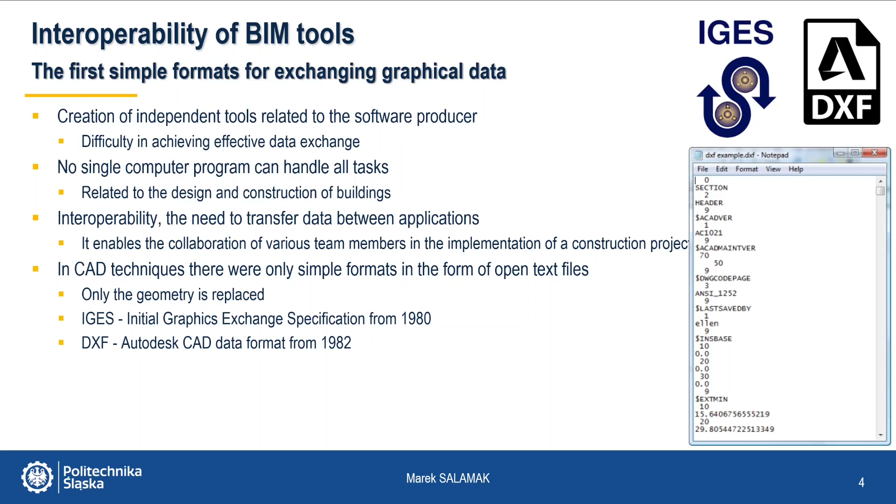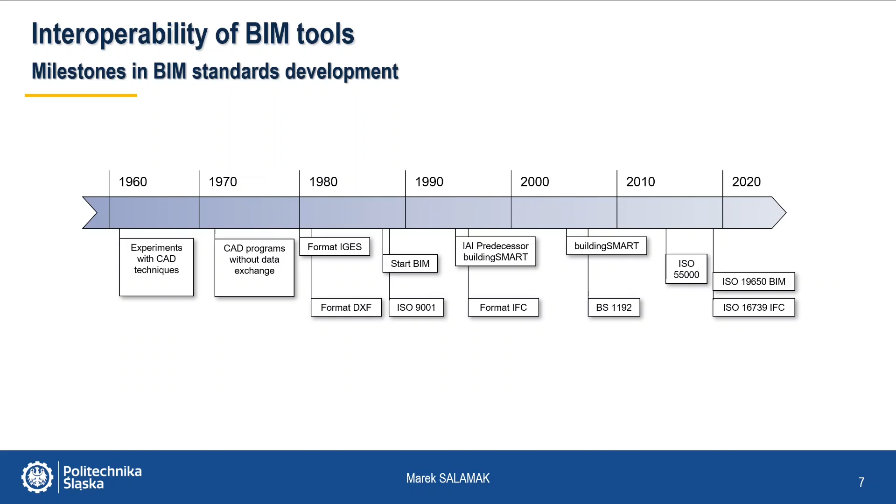The publication of BS 1192 and a series of international ISO 19650 standards has significantly accelerated the implementation of ISO 55000 compliant asset management systems and information management systems by infrastructure managers.

In the case of BIM models, the formats used in CAD and GIS techniques turned out to be insufficient. So software vendors began to communicate, and organizations such as Open BIM Network, the National Building Specifications and buildingSMART International were born. They contributed to positive changes, thanks to which new tools are becoming more and more useful for all users, not only for the industry for which the software is dedicated.

In 1994, the Industry Alliance for Interoperability was established to develop an object-oriented class structure for storing a unified building model. The association was then renamed the buildingSMART organization that exists to this day.

It deals with developing the universal IFC standard, IFC data exchange format, which means Industry Foundation Classes, and other related standards. It is mainly the Information Delivery Manual, IDM, describing what data and when are to be transferred in the business process, which can also be the construction process, and the Information Framework Dictionary, IFD, which describes the stored data in the form of a dictionary of terms.

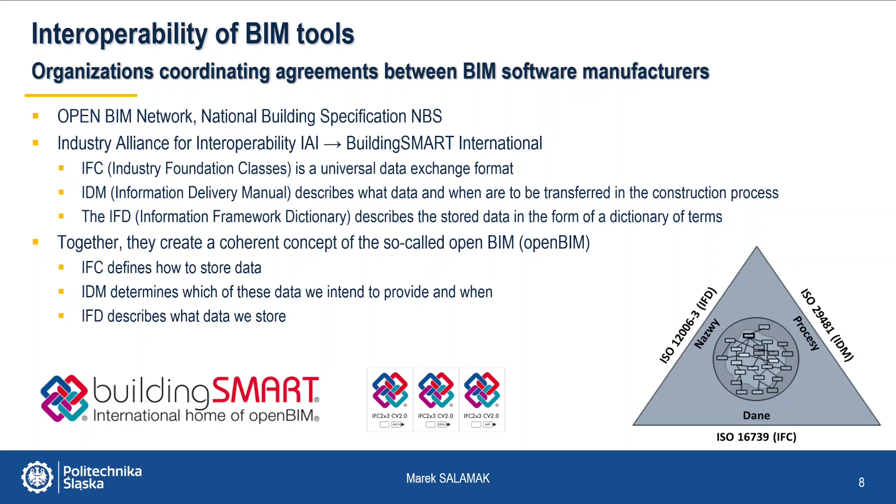Together, they create a coherent concept of the so-called Open BIM, represented on such a triangle. In short, it can be said that the IFC defines how to store data, IDM determines which of these data we intend to transmit and when, and IFD describes what data we store.

Standardization and the system of standards and technical requirements is the basis for the functioning and development of all sectors of the economy. The construction industry also uses many such documents. Some of them regulate general requirements or relate to other types of industry that are related in some way to our industry, construction industry.

There are also norms, standards, with a much narrower application that correspond to the specificity of, for example, bridge structures, bridge construction.

Introducing the BIM methodology to widespread use also requires appropriate standardization, which will ensure equal access to the services and supply market and freedom of competition.

Currently, the most intensively developed international standards in BIM are the result of combination of works within the Building Smart Association and the ISO and CEN organizations.

They are characterized primarily by being open to all producers of software tools for creating and editing BIM models. The condition is implementing the standard in a given program by creating appropriate commands and algorithms for data exchange. I mean, just export and import, which is not usually simple.

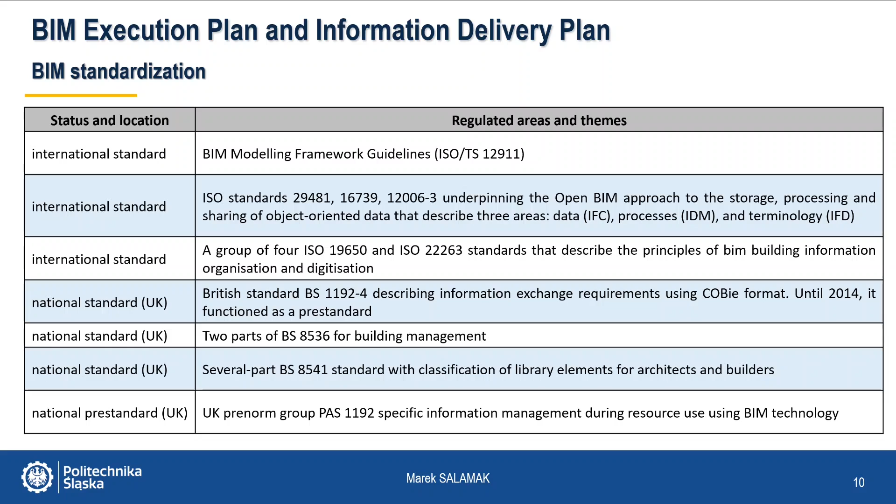Here we have shown the transformation of British standards and pre-standards into the ISO organization standard system.

Similar works are now underway at the Polish Committee of Standardization, and successive ISO standards related to BIM will be translated successfully from English to Polish.

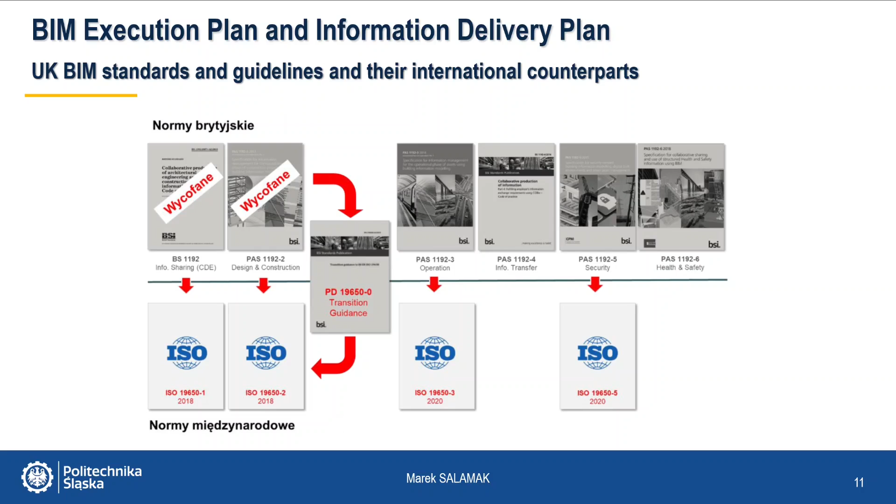The basis of this triangle that accompanies us today is the IFC format, which means Industry Foundation Classes, used for modeling data about buildings.

The IFC exchange format is described in ISO 16739 and is available on the Building Smart website. Although this standard is already marked in Poland as PN ISO, that's a Polish standard, it has not yet been translated into Polish. It describes the world's most widely used standard for digital 3D model recording, including information about a building object. It is the IFC format.

It is an open international standard for BIM data used for information exchange between participants' software in the construction process. The description of the data schema was carried out using the Step Express language, which is used to describe the data structure and the relations between them.

The IFC scheme was also supplemented with XML. Its syntax is based on tags that look like HTML structure used to create hypertext documents. The use of both data description methods makes it possible to present the object data in the form of open text. Thanks to this, it can be read and written by any software adapted to this.

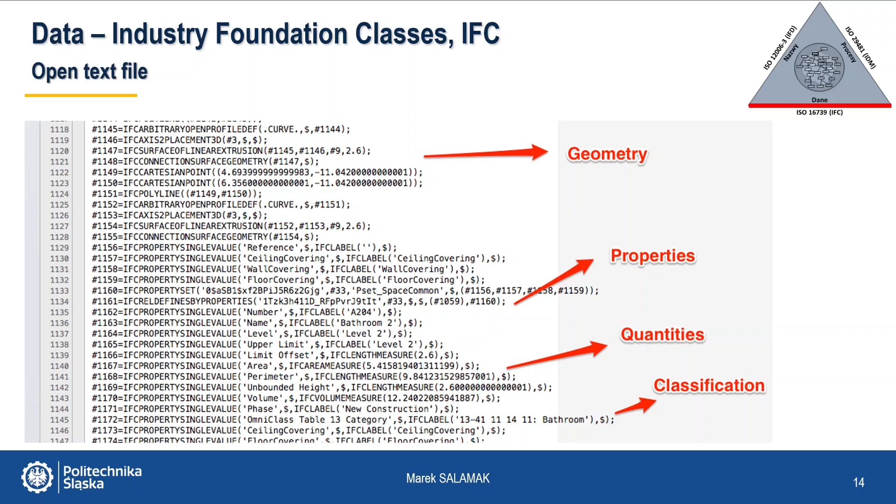This is what a fragment of an IFC file looks like. As I said, this is an open ASCII text file. Each row has its identifier in the form of a row number. These files, individual fragments, are used to describe the geometry, properties, provide parameter values, number of elements, and classification.

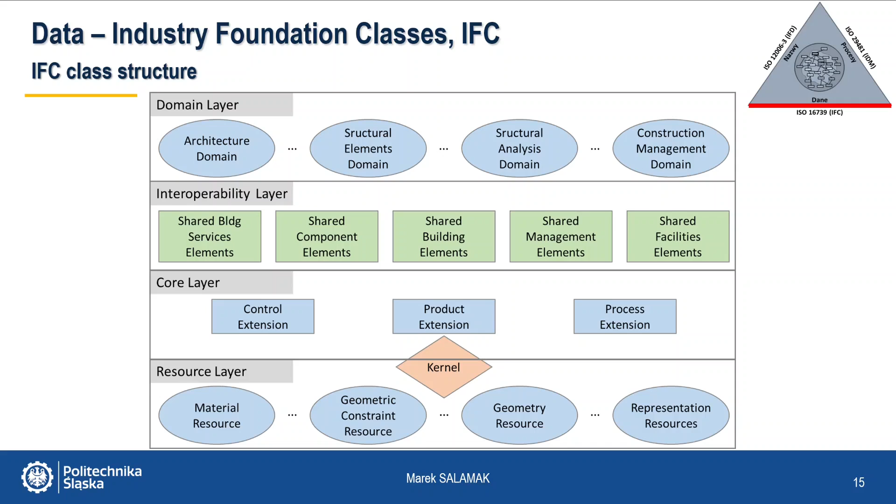An essential class in the IFC class hierarchy is the IFC object class that describes everything that exists. It is quite a broad term taken from programming, which can mean physical objects like a beam or column, and non-physical objects like processes or resources. Also assigned to this class are dependency relations between objects such as association, allocation, aggregation.

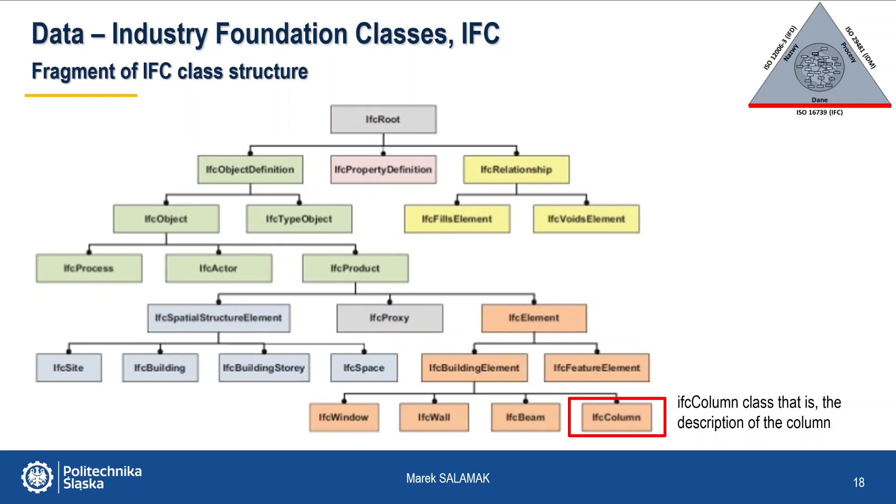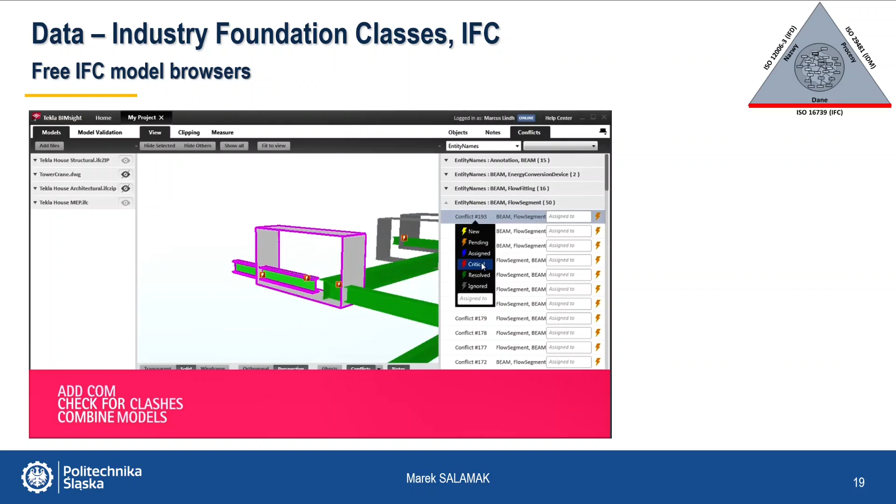Because the IFC format is open and text-based, you can easily create tools for its generation, modification, and interpretation. There are also many free viewers for models saved in the IFC format.

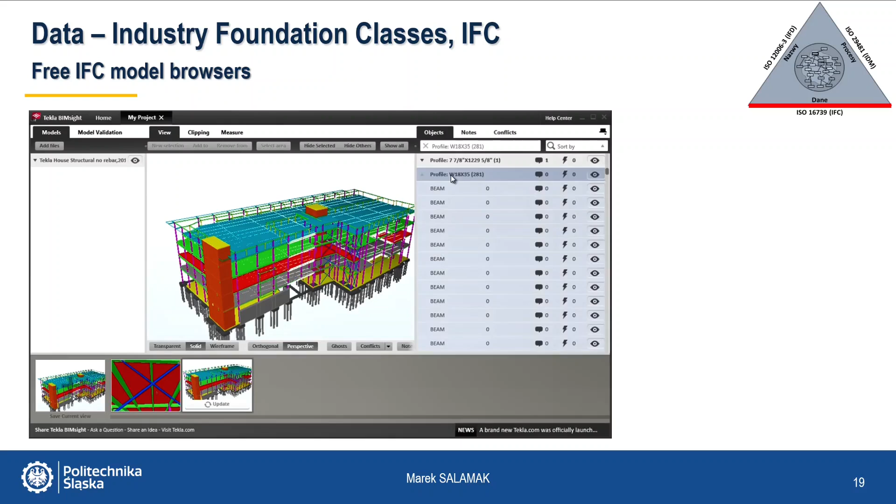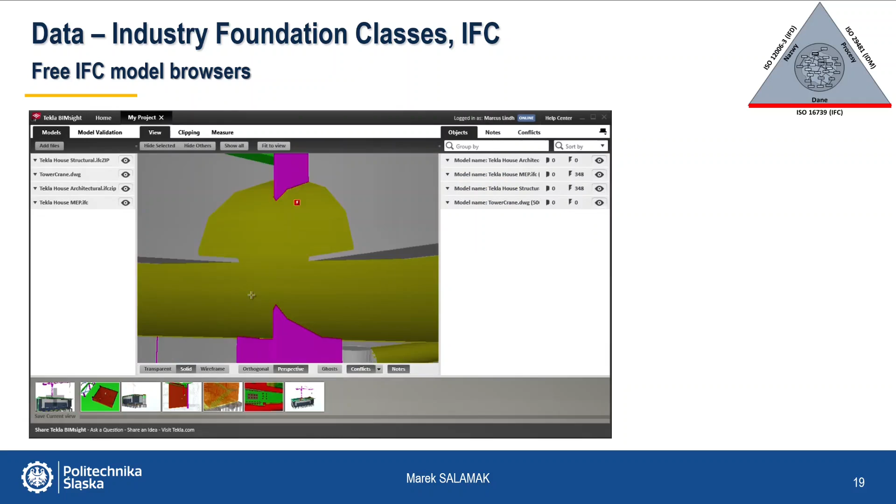Here's one example in the form of the now undeveloped Tekla BIMsight software. After Tekla, the Scandinavian company, was taken over by the American corporation Trimble, its role was taken over by a new Trimble Connect product.

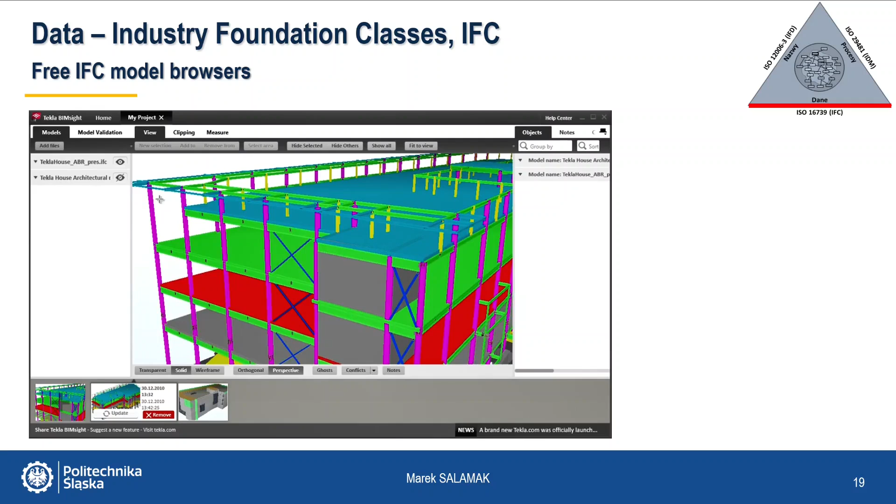Polish BIM Vision browser, developed by the Krakow company Datacomp, has excellent reviews. These programs' advantages are the open API that allows you to create plugins or use a graphic engine in your applications. In this way, the number of users expands, along with community panels and new application areas.

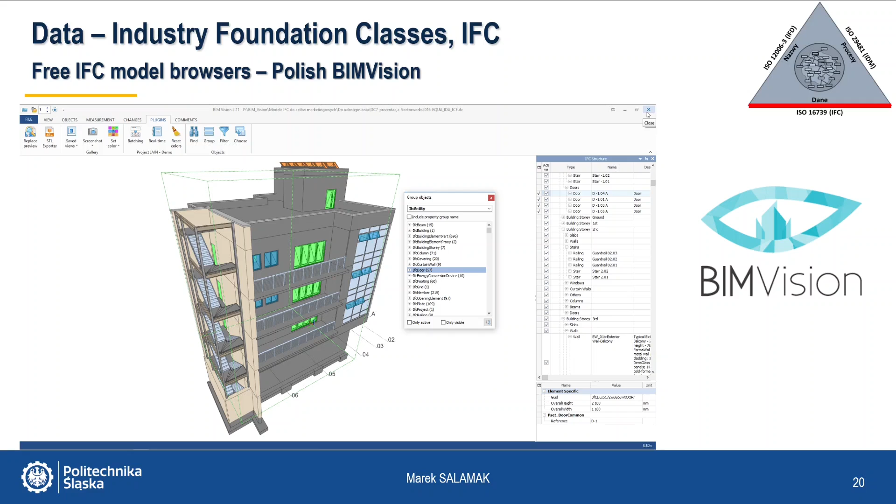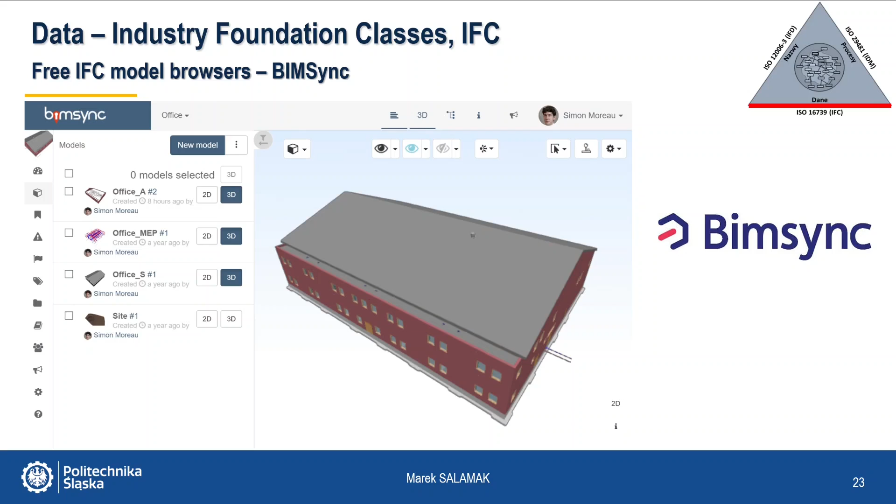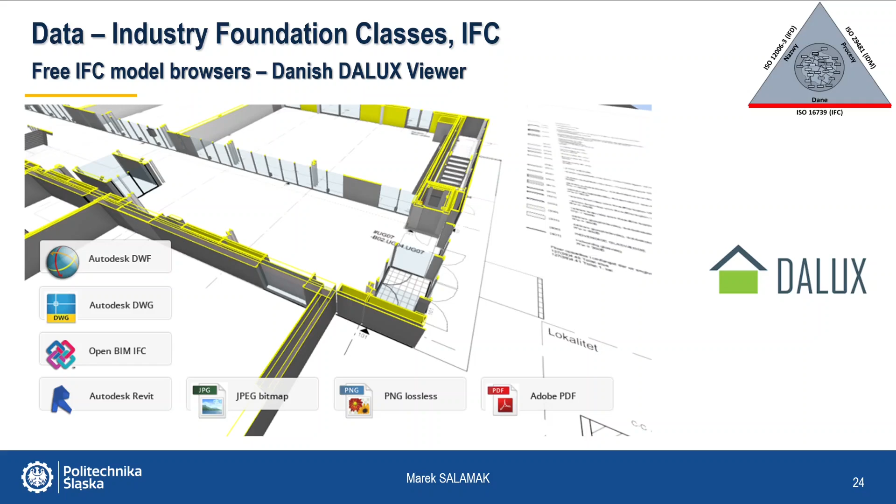Danish company Dalux is developing its browser, which is dedicated to mobile devices such as tablets or smartphones.

The Building Smart organization is gradually developing the IFC format. The implementation of this standard in commercial applications appears with some delay, of course. The date of the standard's announcement doesn't mean that software producers will be ready for implementation simultaneously.

Bridge elements appeared only in version 4.2, but are only now being implemented in commercial programs. In subsequent versions, elements of railway and water infrastructure are to be added.

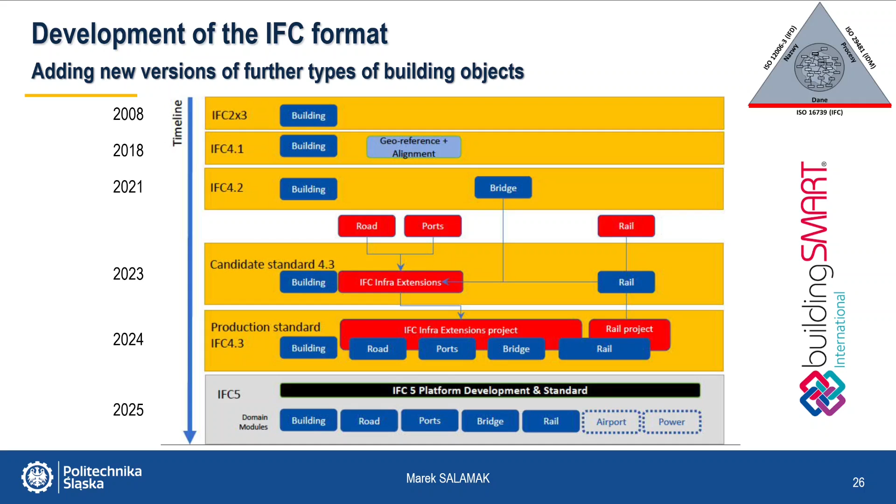Here it is shown in a slightly different form, from IFC 4.2 to IFC 5. You can see that consultations with the industry and software producers are postponed to the final stages and don't end right after 2022.

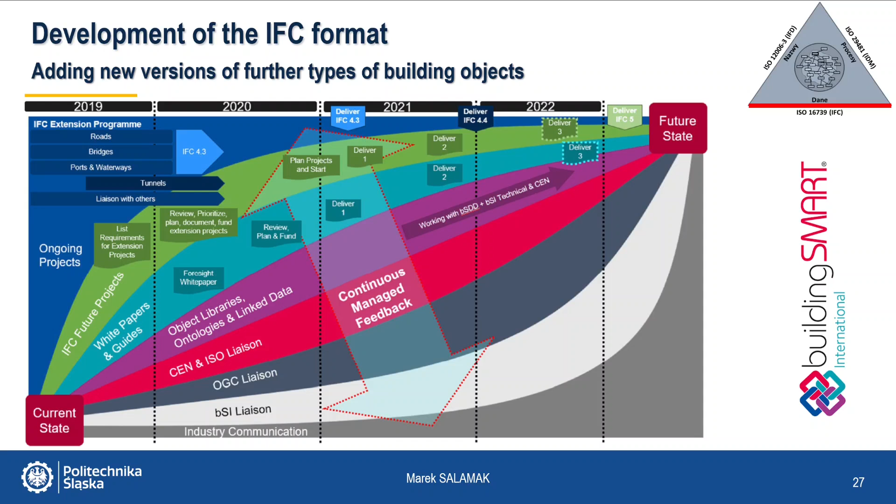The processes are described in the standard, which is the right side of our triangle here. There is IDM, called the Information Delivery Manual.

The IDM exchange standard is an information delivery instruction described in the two-part ISO 29481 standard. These standards also have a PN Polish equivalent, but still without translation. Its purpose is to define and locate the data that we want to transmit using IFC files.

Usually, the number of participants in the construction process and the amount of information exchanged between them is too large to be directly implemented in the IFC record. Each participant only needs a specific and necessary part of all the data.

And this change, along with the successive stages of the facility's life - design, construction, and maintenance - also occurs as they move to the next stages of the project, including the facility's life cycle.

They often change. To effectively describe these changes, a tool was created to describe business processes and related data exchange in a process map.

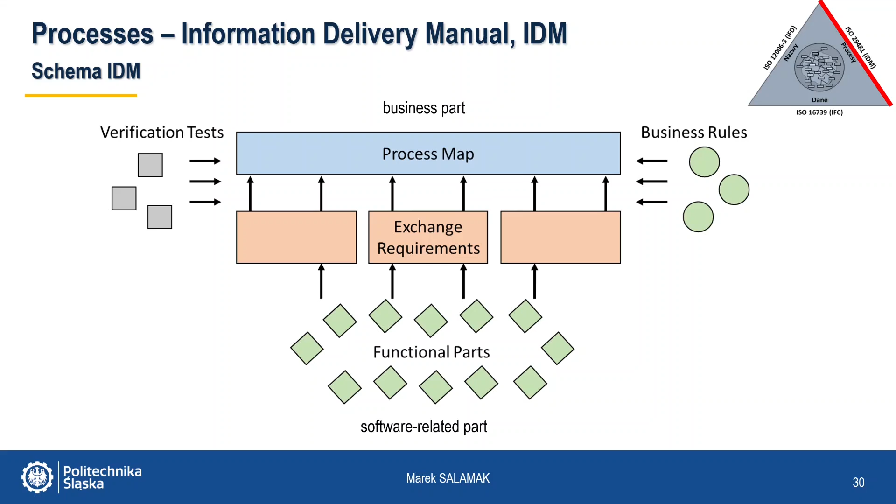Their task is to describe the repeating elements of the information exchange requirements in a programmable way.

The process map describes the activities needed to exchange information in a given process. Thanks to it, we obtain a list of activities in the process, the sequence of activities, a list of process participants, and indication of the information exchanged.

There are different methods for creating process maps. The business process modeling notation, BPMN, method was adopted in the IDM standard.

It is a graphical notation used to describe business processes and models, often used to optimize enterprises' processes.

This notation is developed by the independent organization OMG, the Object Management Group.

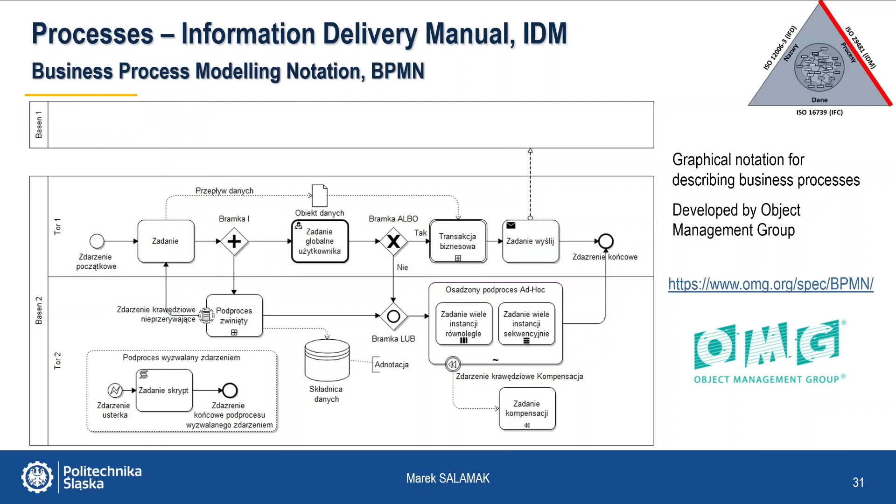Here we can see a graphical instruction on how to use BPMN to create a process map using this notation, available on this organization's website. It has also been Polonized into a Polish version for some time.

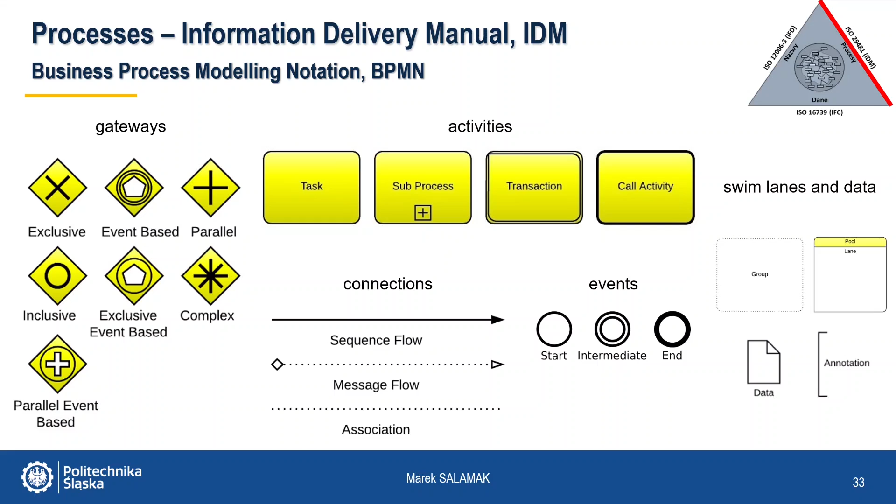Here we see selected symbols used to create process maps in magnification. So we have gateways, activities, events, connections between events or activities, and swim lanes and data.

Next, we have activities that describe the tasks they perform. And we also have data objects that describe the information transferred between participants.

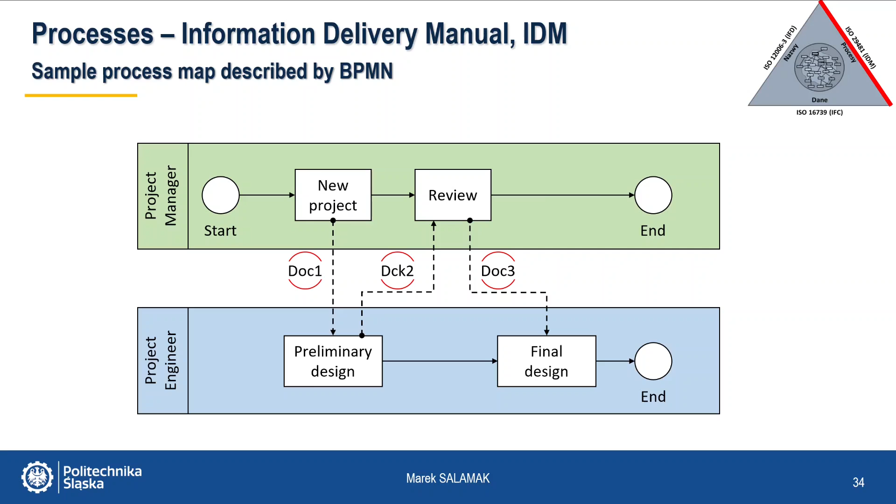The management of definitions and names is described in the form which is in the norm, which is the left side of our triangle. It's about IFD, Information Framework Dictionary.

The IFD standard is described in the ISO 12006-3 standard. It facilitates the creation of multilingual dictionaries, terminologies, or ontologies.

IFD provides a feasible method of linking IFC data to existing knowledge systems, projects, and product databases.

Moreover, IFD provides the possibility of multilingual translation of information from IFC, introducing a conceptual grid, calling it ontology, used in the construction industry for the linguistic and legal localization of the terms used.

Examples include fire resistance or door width. It has different names in different countries, like fire rating in English, and different description units, like Fahrenheit degrees or hours, depending on the country and the standard.

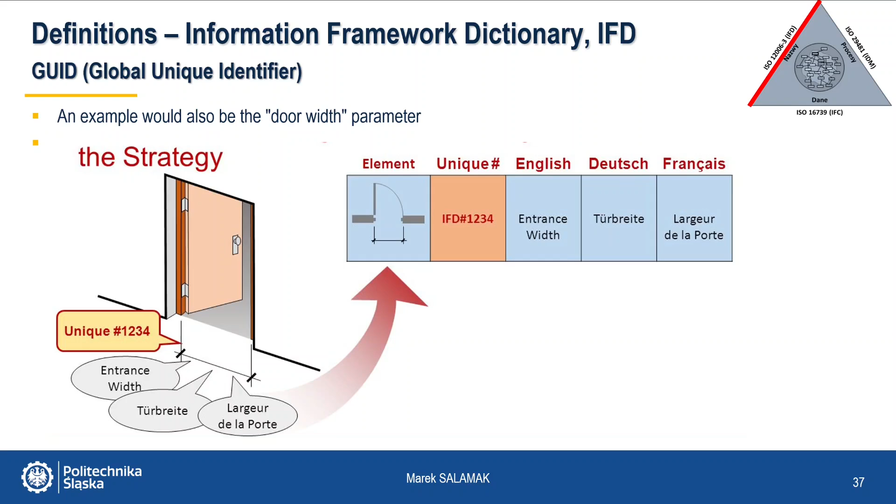IFD was used to create a technology labeled BSDD, that's the Building Smart Data Dictionary.

It is a library of objects with attributes which, thanks to special references, assigns descriptions downloaded from the database to elements present in the model. Thus, it enables the precise identification of the information contained in the model.

The independent BCF format, called BIM Collaboration Format, is responsible for supporting cooperation. Collaboration and communication flows have been deliberately excluded from the scope of the IFC.

IFC was intended to provide self-contained data models. However, it didn't solve the need to exchange information related to a specific part of the project, such as requests for information.

It also didn't allow for the coordination of sequencing or solving problems occurring during the project lifecycle.

To guarantee a neutral way of exchanging questions, comments, and problems regarding IFC files, a neutral BCF format was created.

Its history dates back to 2010, when Tekla and Solibri began to develop an initial BCF scheme called BCF XML.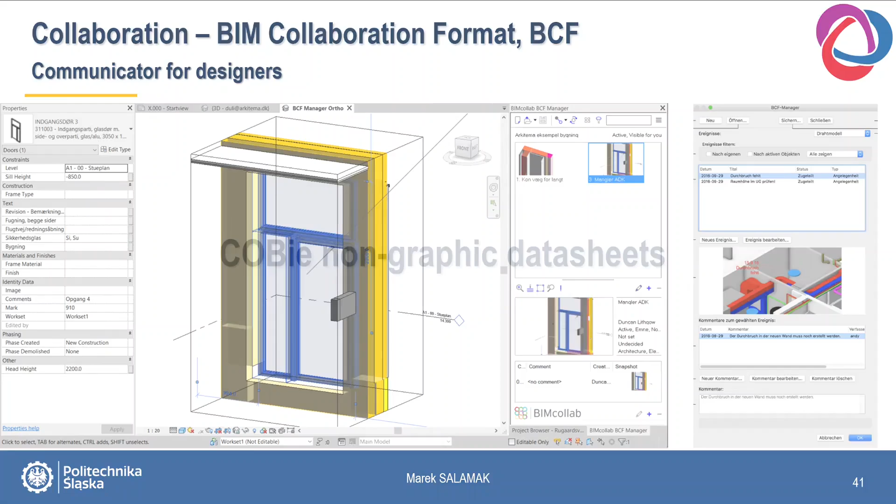Now a few words on a non-graphical COBie datasheet. This format is not so popular in Poland yet, but it is also an open format, and it fits in with the Open BIM philosophy.

COBie is a documentation standard that contains data for facility management. It is in the form of a simple spreadsheet, completed depending on the project phase. The sheet data includes the equipment of the facility and information about each equipment element, technical and operational parameters, origin, price, warranty period, date of installation, spare parts lists, inspection dates, etc.

It can be used with various building classification standards, which I will talk about in a moment. For example, the American OmniClass, the British UniClass, or the Norwegian NS 3451.

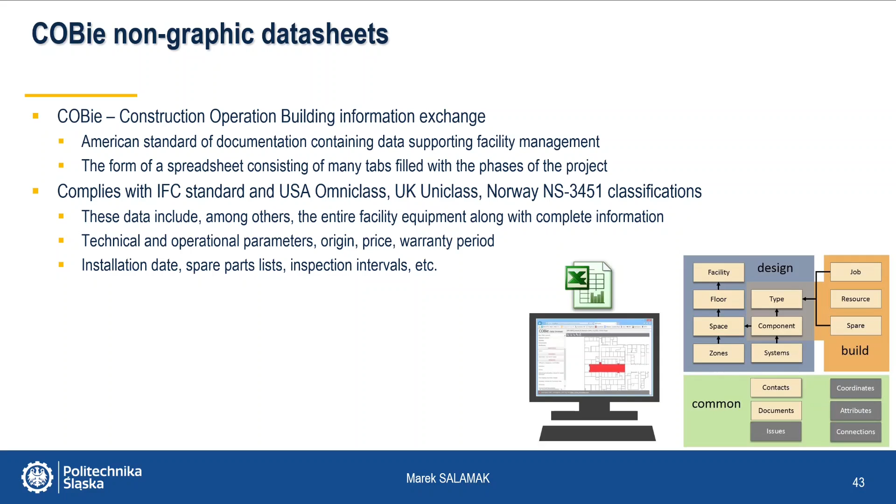The most important feature of COBie is interoperability, which is both at the user level, because the data recorded in this standard is available and understandable for virtually every supplier and other participants in the investment process, but also interoperability at the designer level, because many programs used to create 3D models have the option of automatic COBie file generation.

Openness is also important. COBie is fully compliant with the IFC open format, and multidiscipline because it covers all industries in a given building structure. By saving them into the COBie sheet, they can then be easily imported into facility management systems.

Here we see an example of the COBie plugin used in the IFC file viewer. Selecting objects on the model highlights certain lines or objects of the sheet and vice versa. Selecting the sheet rows results in highlighting the object in the model.

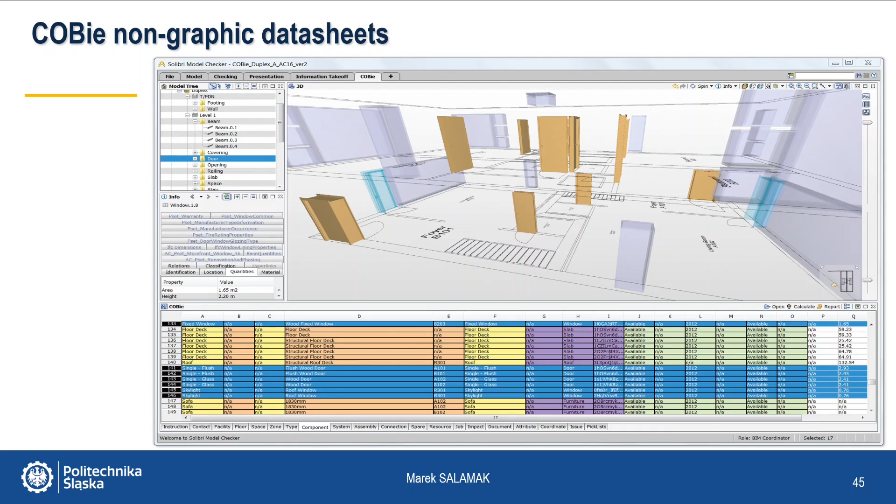Now we will discuss construction classification, which should also comply with the BIM methodology. Apart from the norm standards discussed earlier, construction classification systems are also important. This is about the classification of materials and types of works used in construction, like the Polish classification of products and services known in our country. Besides, there are also such systems in Poland as the Polish classification of construction objects, Polish classification of activities, common procurement vocabulary used in public procurement, or used in the costing of material input catalog.

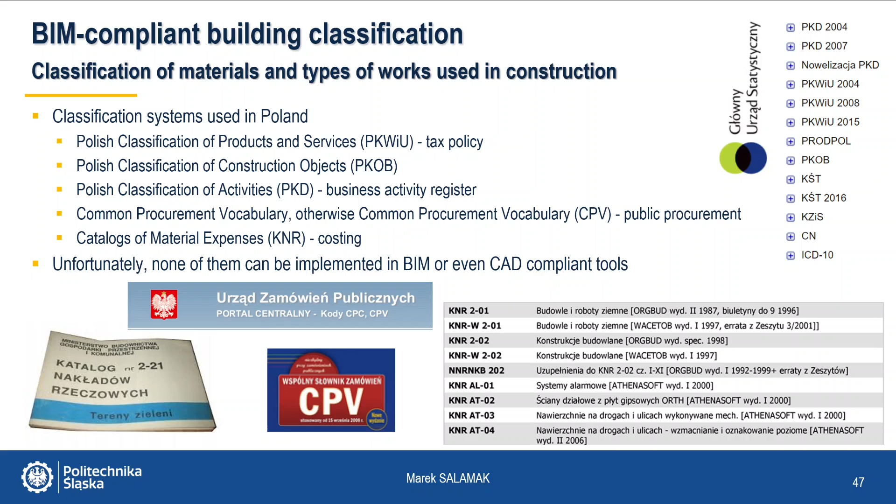I used these yellowed books myself when I was still a student in the times of communism in Poland. It was many years ago. Unfortunately, the approach to costing construction works in Poland has not changed since then, and it's time to finally change it with the implementation of the BIM methodology, because virtually none of these classifications can be directly implemented in BIM compliant tools or even CAD.

Meanwhile, there have been construction classifications globally for a long time, which were first used in CAD systems and then developed and adopted to the BIM methodology. The most famous systems are the American OmniClass and the British UniClass.

The OmniClass system is a classification system used to organize and retrieve information in the construction industry, developed by the US Construction Specifications Institute in the early 1990s. Today it complies with the latest international ISO standards for BIM. OmniClass contains 15 tables, which also include products and works.

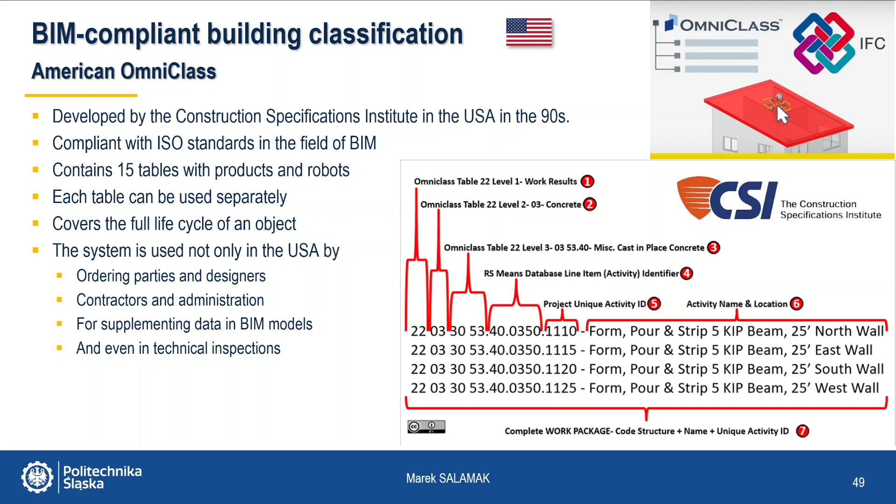Each table can be used independently to classify a specific type of information. They cover the entire life cycle of the facility, from the concept to its demolition. The system is widely used by ordering parties, clients, designers, contractors, and administration to complete data in BIM models, and even for inspections and technical condition assessment.

UniClass is a consistent classification for all products in the construction industry developed by the National Building Specification in Great Britain. It contains tables that classify items of any scale, from small products, like an elastomer bearing, for example, to large objects like bridges or buildings.

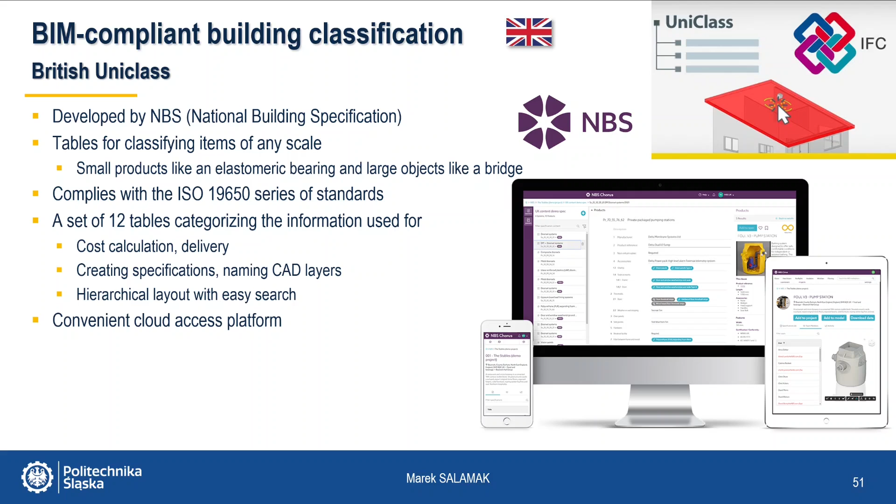UniClass complies with the ISO 19650 series of standards. It is divided into 12 tables that categorize information used for costing, delivery, specification, CAD layer naming, etc. The table layout is hierarchical and allows you to find the information you want easily. NBS has also prepared a convenient platform for accessing the classification, which is based on cloud solutions.

Here is an example of using Uniclass to describe several products and construction works. We have fixed bridges, bridge abutment wing, bridge bearing, and even an elastomer expansion tape for expansion joints. I just chose the formwork assembly and the bridge inspection for works.

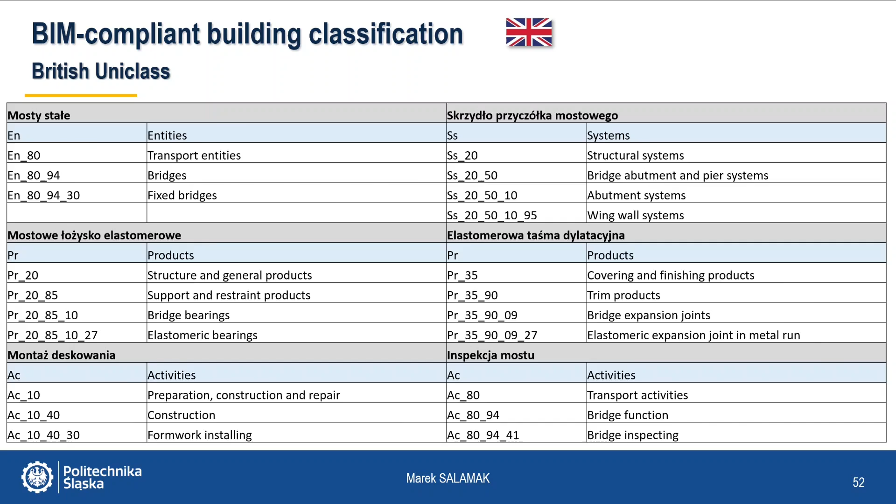For the effective implementation of the BIM methodology in our country, or any country, there is no Polish construction classification system that could be used for costing with the use of BIM models. Such a system should be compliant with the provisions of the Polish standard PN ISO 12006, which will ensure its consistency with international standards. It will also be desirable to use good European examples, but taking into account the specificity of national costing practices.

Now let's move on to the rather monotonous and boring description of BIM information and management processes. Unfortunately, we have to go through it because, in fact, it is a key element of the BIM methodology.

When performing contracts using the BIM methodology, several additional documents and procedures are used in relation to the classic contract provisions. They result from the relevant standard regulations, in which the ISO 19650 series of standards is the leading one. These standards were created based on the British standards of the base BS 1192 series, which had previously been tested in practice on many contracts. Their transfer to the international level resulted from their effectiveness in implementing BIM in Great Britain. It also made more and more countries decide to implement the BIM methodology in this way.

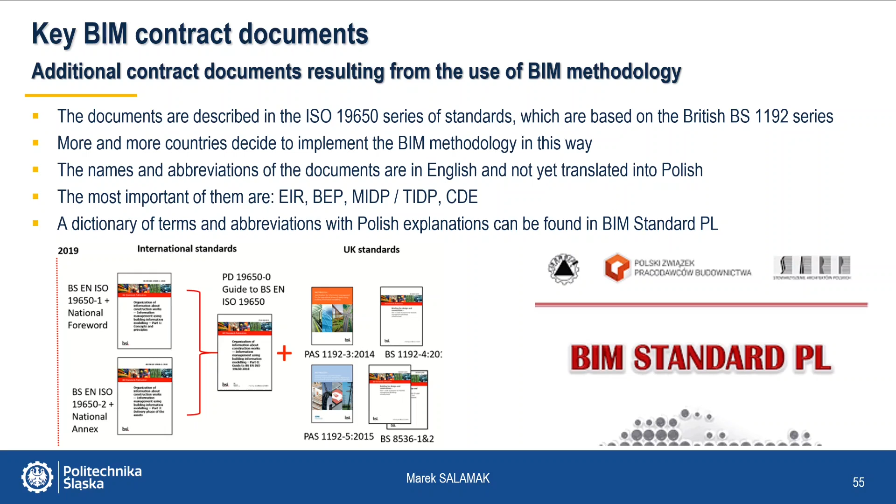On the occasion of preparations for the first pilot project in Poland in infrastructure, the consultant team selected by the National Road Administration, in the form of the ECC BIM Foundation, developed a dictionary of the most important terms related to BIM. This dictionary was later developed into the BIM standard PL, thanks to which it can be consistent with future national regulations.

The method of information management and data processing depends on all construction process participants like client, designer, contractor, and manager, who take responsibility for part of the entire process. This means that investors who ask for, let's say, a BIM project in the contract will not meet the requirements of ISO 19650 and will not achieve the expected benefits.

Their participation in accurately determining what they require is of fundamental importance. The same will be true when inappropriate tools are used in the BIM process. For example, using a shared plain cloud drive as a CDE solution will not meet ISO requirements.

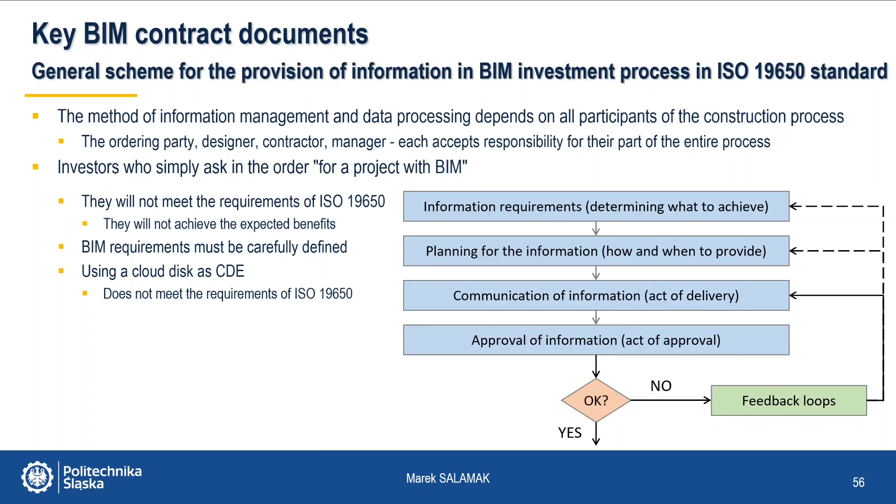The client's precise information requirements and goals that he wants to achieve concerning BIM use are also related to the investment lifecycle. This is because the information model of a building is created differently at the design stage and differently for the operation and management of the finished object.

The first case is referred to as the Project Information Model, PIM, which designers produce in the design process when not all of the details of the BIM model components are needed. The manufacturers and suppliers of specific solutions and equipment are not yet known. It is enough for the required target parameters to be defined so that it is possible to prepare project documentation.

Based on such a prepared PIM model, the contractor and subcontractors already create the operational Asset Information Models, AIM, during the implementation process. Before final commissioning, the information of the BIM components used is completed. These can be exact performance parameters, service information, warranty periods, datasheets, certificates, material tests, load tests of bridges, etc. These documents and information may be associated with 3D graphical objects. Still, the AIM model, due to the nature of the data stored, often takes the form of a spreadsheet, as is the case with the COBie standard described below.

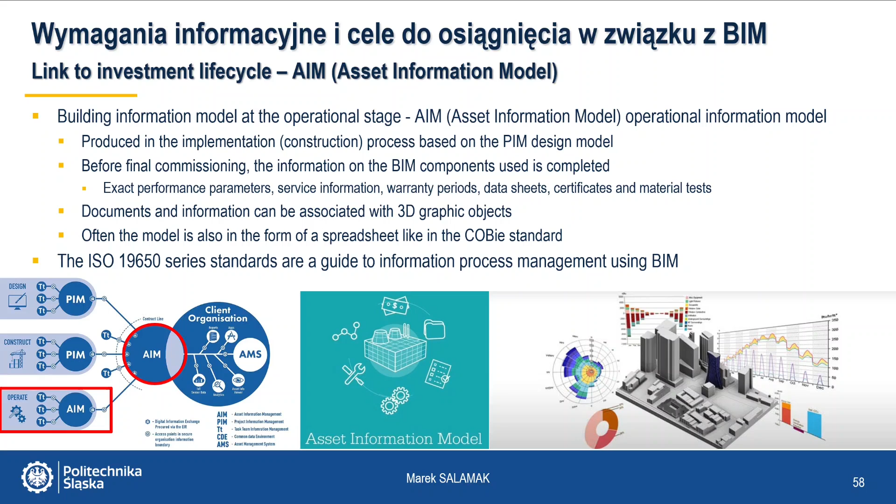Therefore, the ISO series standards are a guide on how to manage the information process to obtain the greatest benefits from the use of the BIM methodology in the investment project, from the very beginning by specifying the PIM model's requirements, but also after completion of construction by entering the requirements into the AIM model.

The implementation of the BIM information process of maturity level 2 follows the principles described by the ISO 19650 standard. The first principle is the purpose of the information process: to create an information model for a building's design or operation. These models are to be structured repositories of information needed to make decisions in the facility's lifecycle, in the design, construction, reconstruction, operation, and demolition stages. Models can contain structured information, which is of course preferred, or unstructured, for example in the form of visualizations

or video clips. The second principle is that the BIM information process is carried out in an environment in which individual process actors' responsibilities are clearly defined, most often included in a table called the responsibility matrix. There are also control and management functions closely related to the BIM process. These include, among others, a BIM coordinator and manager or information manager.

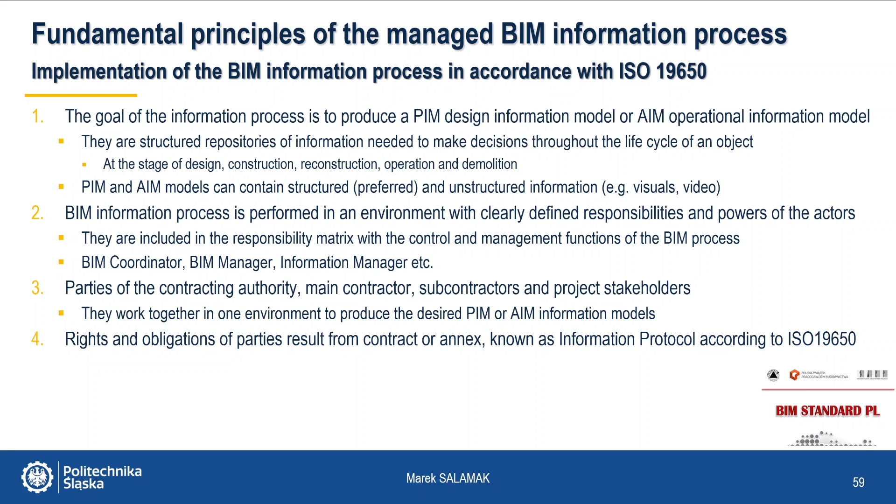The fifth principle: the process is divided into stages. In contrast to the British BS 1192 series standards, the ISO 19650 standard allows the project to be divided into any number of stages according to the client's needs and the project specificity. The stages are related to project milestones and data exchange points. These are either specific dates or other specific time points, for example depending on controlled or uncontrolled breakthrough events, such as obtaining an administrative decision. At these points, the employer requests information to decide whether to accept the stage or the need for further works.

A sixth principle: at each stage, for individual components of BIM models or groups, an increasing level of the necessary LOD information is defined, which the employer requires to meet the stage's information needs. As a result of the project implementation, the project's information level and value are gradually increasing.

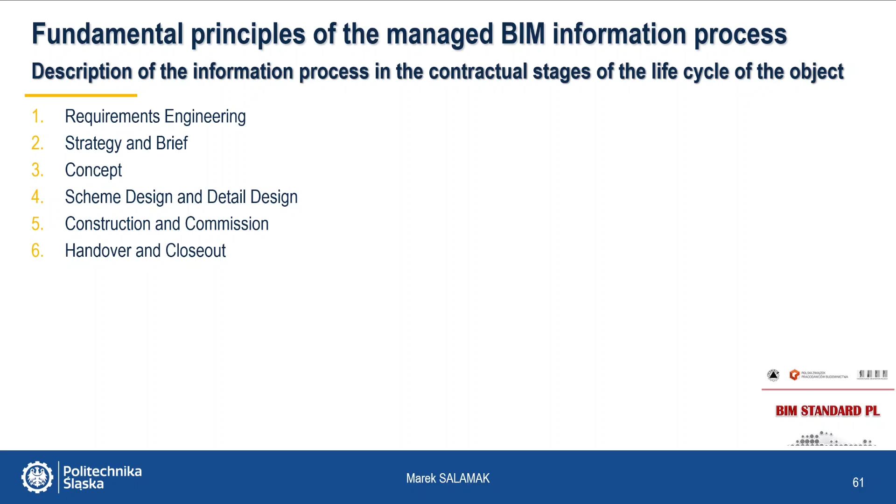The description of the information process is contractually divided into 6 stages of the facility's lifecycle. These are the following stages: requirements engineering, strategy and brief, concept, scheme design and detail design, construction and commissioning, and finally handover and closeout. One of the employer's first tasks needed to define the process of managing development and delivery of BIM information models is to define the stages of the development of your own project.

It is an essential element of managing the BIM information process in the project, as these stages will be associated with many elements of this process, such as milestones of the project, scopes of information supply like MPDT tables, LOD definition levels, data delivery points, and employer's decision points. They all constitute important components of the management process, as they span the entire BIM process over time and link the development of information models in a qualitatively controlled project environment with it.

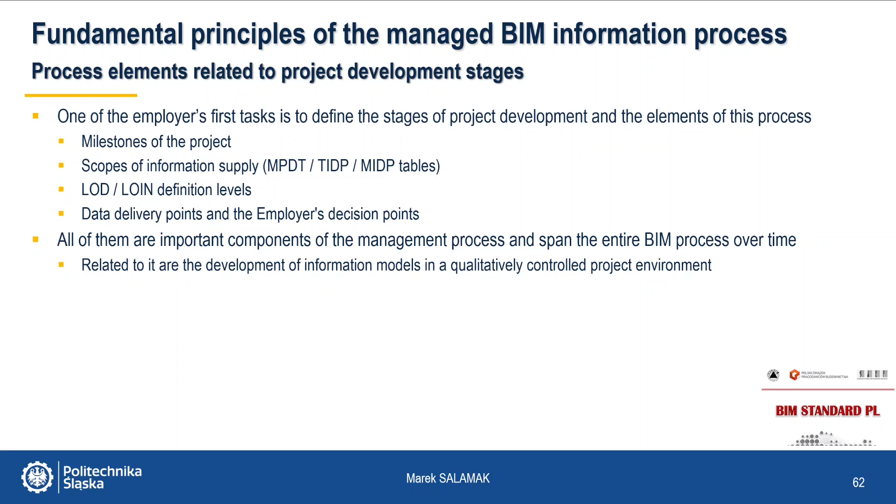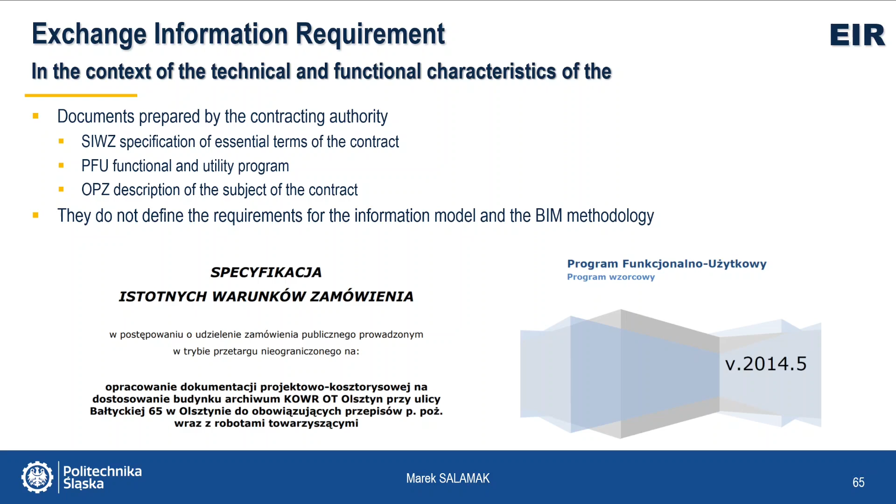In the first step, the contracting authority, the client, the employer, must define the scope and method of information management in the planned project or contract. The investor's requirements describing the ordered object and the context of its technical and functional properties are usually described in documents called the terms of reference, specification of essential terms of the contract, PFU, that's in Polish, it's Functional and Utility Program, or OPZ, this is also an abbreviation coming from Polish, description of the subject of the contract.

Such a document in the ISO 19650 standard is EIR, meaning Exchange Information Requirement. It should also be noted that the abbreviation EIR in the nomenclature of British standards means Employer Information Requirement, so it's a little bit different. In the ISO 19650 standard, the provisions concerning information requirements have been developed. It is about precisely describing the requirements for information processes that will be attached to other documents such as PFU or OPZ, already mentioned on the previous slide.

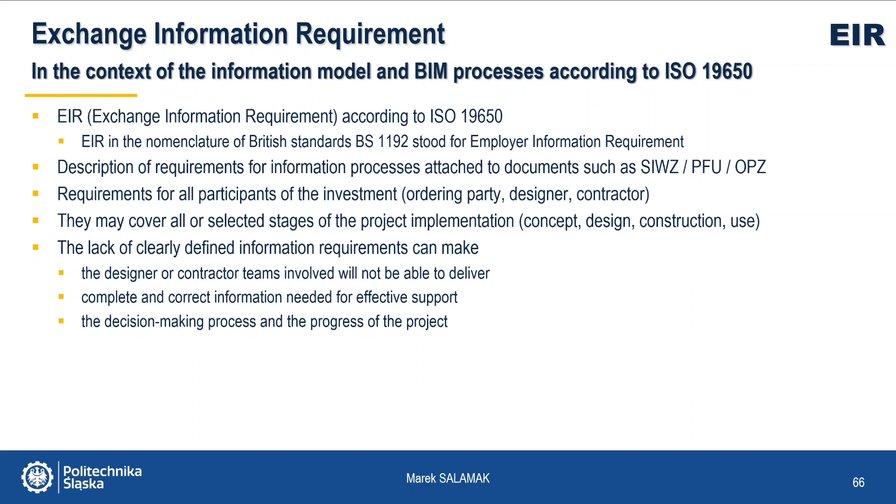Already at the tender stage, the requirements in this respect should be specified for all investment participants: the ordering party, designer, and contractor. Depending on the needs, they can cover all or selected stages of the project implementation: concept, design, construction, use. Well-prepared and as precise as possible information requirements are a key factor enabling the joint and effective management of information during the project lifetime. The lack of clearly defined information requirements may increase the likelihood that the design or contractor teams involved will not provide complete and correct information to support the decision-making process and progress effectively.

Essential documents that the contracting authority should prepare for contractors and suppliers are: Organization Information Requirements, OIR, which relate to the contracting authority's own business goals; project information requirements, PIR, which relate to the goals of the implemented project; asset information requirements, AIR, which concern information about resources provided in connection with their subsequent operation and maintenance; and EIR, exchange information requirements, which describe how the information will be exchanged between the parties.

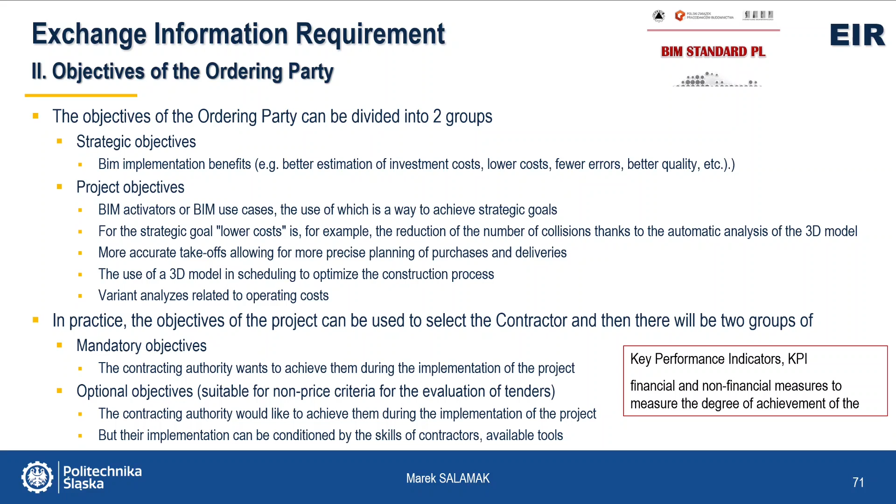The third chapter describes the management requirements. The contracting authority provides the contractor with a template of another document, such as the BEP and the MIDP or TIDP tables. We'll discuss them in a moment. In this chapter, the contracting authority defines which norms and standards are to be applied.

Next, the employer describes the file naming standard expected by him in the project. The file naming standard facilitates easier and faster access to information by all project participants. The file name can define the type of documentation, its status, and the area of the project it relates to.

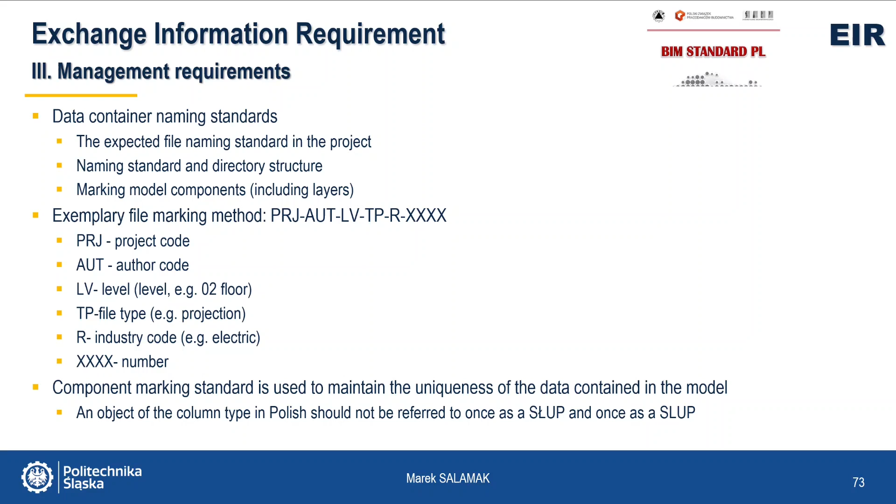The next element concerns the role of people in BIM methodology. Now we will know them. The procuring authority, the client, should define expectations regarding roles and responsibilities in the information process. In response to these expectations, the contractor should assign specific persons and their contact details to individual roles and responsibilities. BIM methodology and related information processes force the necessity to define new roles and responsibilities for the key personnel who implement the construction investment.

These people's competencies and the experience required for them do not coincide with the requirements imposed on people currently performing the so-called independent technical functions in construction: designer, construction man, site manager, or supervisor. Besides, they must be available to virtually all parties involved in the investment. Their knowledge and competences cannot be limited to only one architectural construction facility or geodetic industry. However, they must demonstrate a high level of skills in the field of digital information processing. Examples of roles include project information manager, BIM manager, BIM coordinator, or BIM modeler.

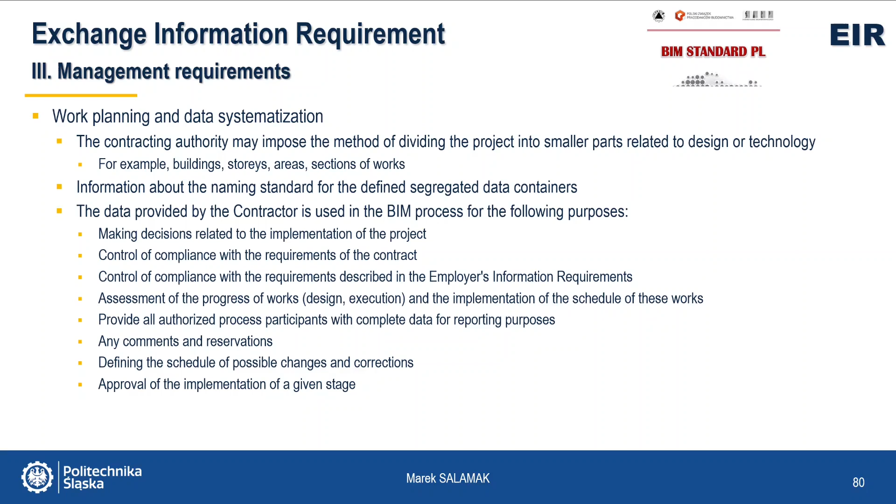The contracting authority defines the methods and tools that should be used to manage processes and data in the project. The primary management tool should be the CDE platform. Therefore, the contracting authority specifies the expected scope of its application in the project. Data security requirements and the method of authorizing access to the CDE platform are also specified.

One of the basic goals of using 3D BIM modeling is to detect and eliminate design conflicts at the earliest possible stages of the project, which significantly affects the investment's implementation costs. Due to the importance of coordination and detection of collisions for the employer, EIR introduces detailed guidelines regarding collision type and scope, which should be verified at the design stage. The processes that the contractors should carry out to eliminate collisions are also described.

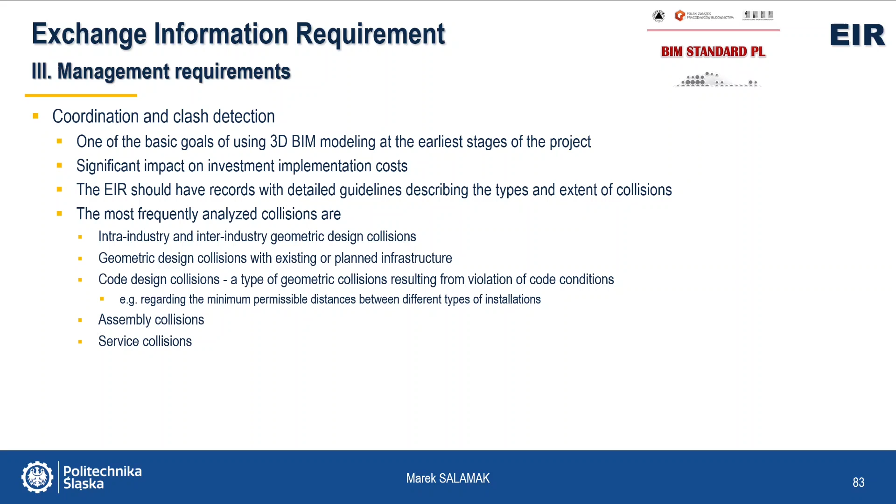The most frequently analyzed collisions are intra-industry and inter-industry geometric design collisions, or with the existing and planned infrastructure. There could be code design collisions resulting from a violation of standard conditions, an example regarding the permissible minimum distances between installations of various types of facilities, as well as assembly and operational collisions.

The employer then defines its expectations regarding the model review meeting. These are quite precisely described, and the dates of meetings are most often associated with the schedule of data delivery points, data drops.

The contracting authority may also define its requirements for using the BIM models in health and safety management. These requirements may apply to the design stage, including taking into account health and safety aspects, such as safe access zones, equipment collisions, marking danger zones, security design, etc.

It can also apply to the implementation stage, for example designing the staging of work phases for safety related to the saturation of specific areas with equipment or people, daily briefings using the model and indication of potentially dangerous zones, simulations of equipment operation, coordination of work and delivery logistics, etc. And finally, at the operation stage, for example, safety of facility users, renovation teams, evacuation routes, monitoring, alarm signaling, etc.

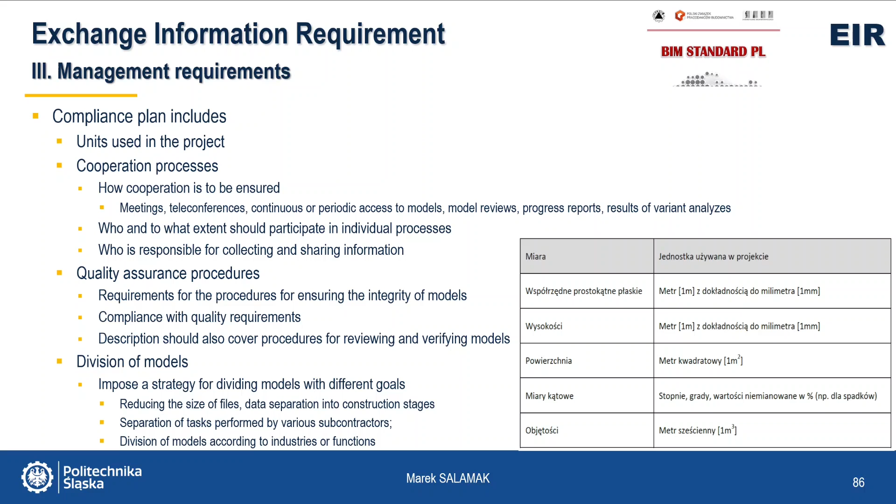The contracting authority should also describe the requirements, the fulfillment of which will guarantee the integrity of the BIM project's models and documentation, the compliance with quality requirements, and the control and verification tools.

The employer should indicate its requirements regarding the method and scope of providing information about the finished facilities and its assets. This is necessary for the maintenance and operation of the facility. The employer's planned scope and types of data for the facility operation stage are described here.

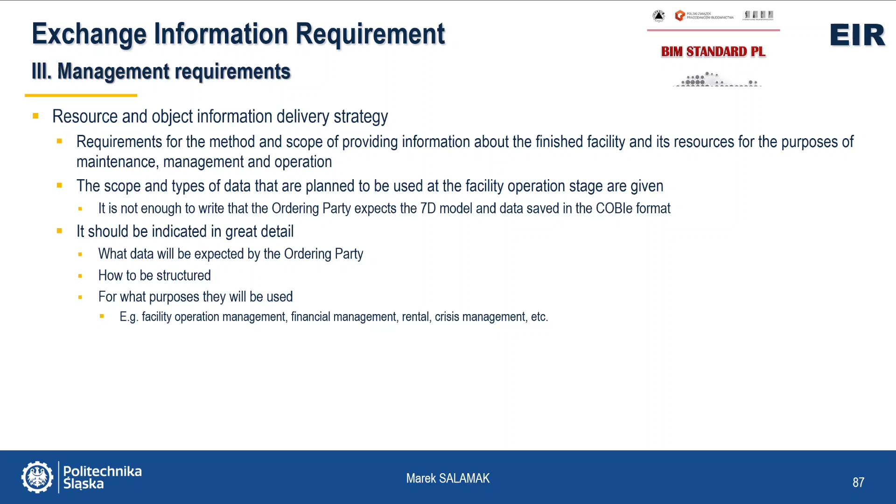Since the BIM methodology requires appropriate standardization of data and processes, a critical element of the BIM process is to define a software ecosystem for the project that guarantees the best possible exchange of information between all project participants.

In the fourth chapter, the contracting authority, the employer, defines its programming requirements that will be used by the contractor in the project, especially in terms of file compatibility, for example the compliance of the version number of the software used by all project participants.

The requirements for the file formats acceptable in the project are defined. Most often, this results from the software owned by the client.

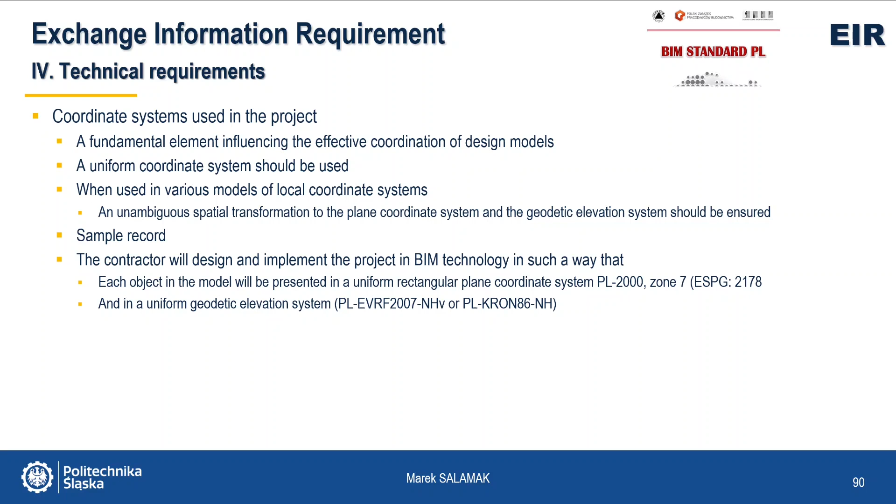One of the basic elements influencing the effective coordination of design models is the definition and use of a uniform coordinate system, and, in the case of using local coordinate systems for various models, ensuring an unambiguous spatial transformation to the plane coordinate system and the geodetic elevation system.

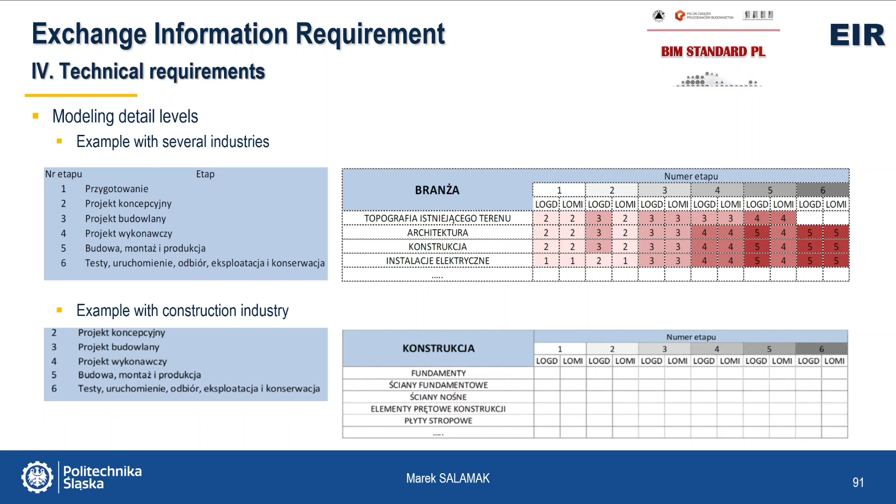In the next part of the fourth chapter, the levels of detail of the model are defined. Here's an example modeling level table for some sample industries, without breaking down into component groups.

Since an effectively conducted design or construction process based on the BIM methodology requires appropriate technical competencies, it is common practice to expect the employer to prepare a competency matrix specifying the necessary level of skills and knowledge regarding BIM processes and tools for the key employees of the contractor and the employer.

One of the basic elements of the BIM process is transferring the generated and accurate data to project participants. From the employer's point of view, it must obtain certain data from the contractor. This data can take various forms: text files, tables, lists, drawings like CAD files, and models.

Contrary to the traditional process, a BIM-based process defines many more data delivery points, called data drops. Their purpose is to obtain the information necessary to make certain decisions, check the correctness of the proposed solutions, check whether the BIM project documentation is implemented at the specific level of detail, approve the stage of work, launch administrative procedures, etc.

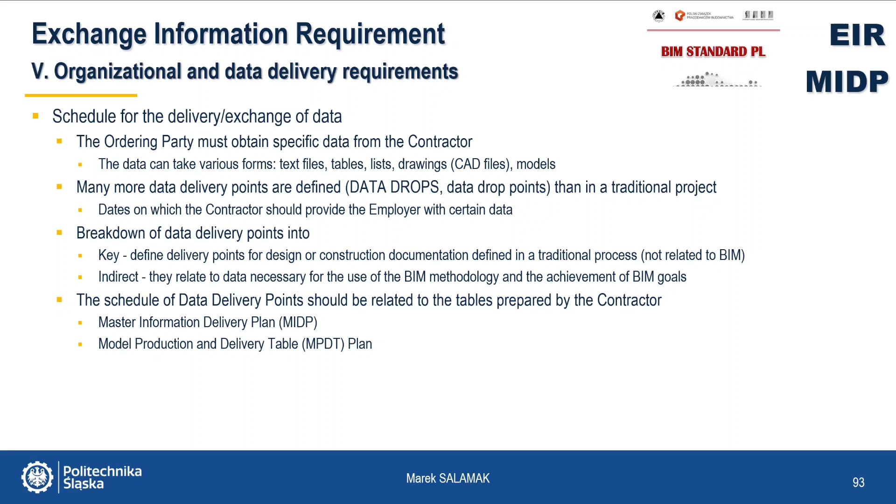The ISO 19650 standard recommends breaking down the supply of design information, the PIM model, according to project phases or stages, and in the case of information related to asset maintenance, the AIM model, breaking it into packages related to anticipated maintenance events.

The contracting authority, the employer, also specifies the scope of BIM documentation and its requirements.

BIM documentation may include industry models, coordination models, isolated models containing specific data, 4D, 5D, or 6D, mapping tables associated with models, CAD drawings, 3D CAD models, simulations, animations, visualizations, results and analysis reports, clash reports, reconciliation and communication reports, etc.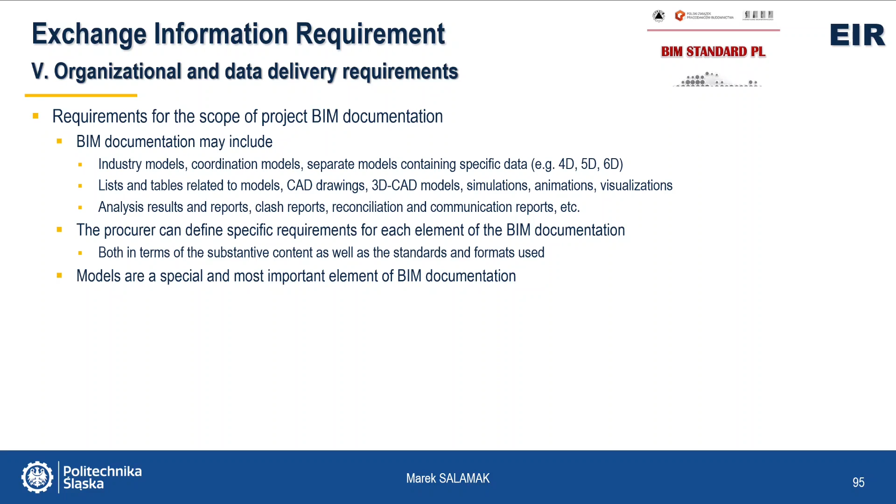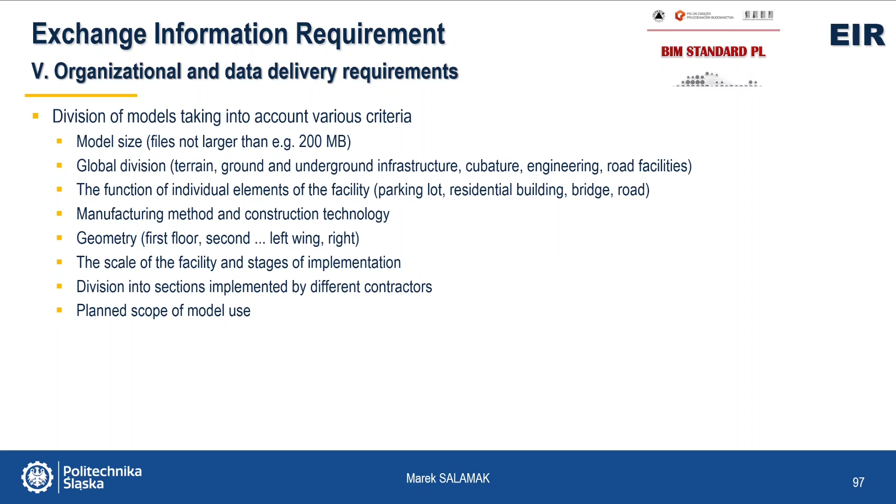The employer party may suggest or impose the use of a specific method of model division, taking into account various criteria, for example model size, global division, the function of object elements, construction technology, geometry, sections of various contractors, or the planned scope of model use.

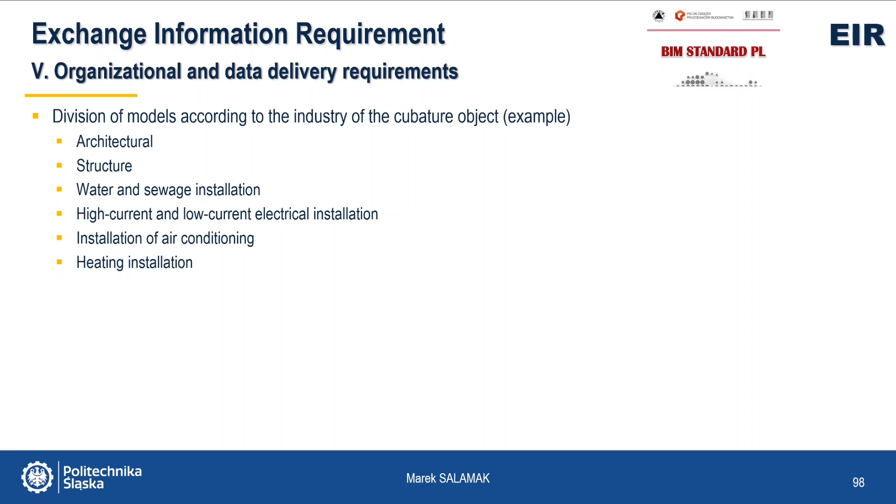If the ordering party has specific industry models requirements, it should describe them here separately for each of these models. The ordering party may describe its requirements and expected BIM competencies regarding both the contractor's organization and the individual key participants in the BIM process on the contractor's side. The description is intended to indicate to the potential contractor the areas of competencies that, according to the employer, will be necessary during the project implementation.

So much for the chapters of the EIR document. Now we will briefly deal with the BEP document, that's the BIM Execution Plan and Information Delivery Plan. In response to the information and information exchange requirements described by the contracting authority in the EIR document, the contractor must prepare its own implementation plans for these demands.

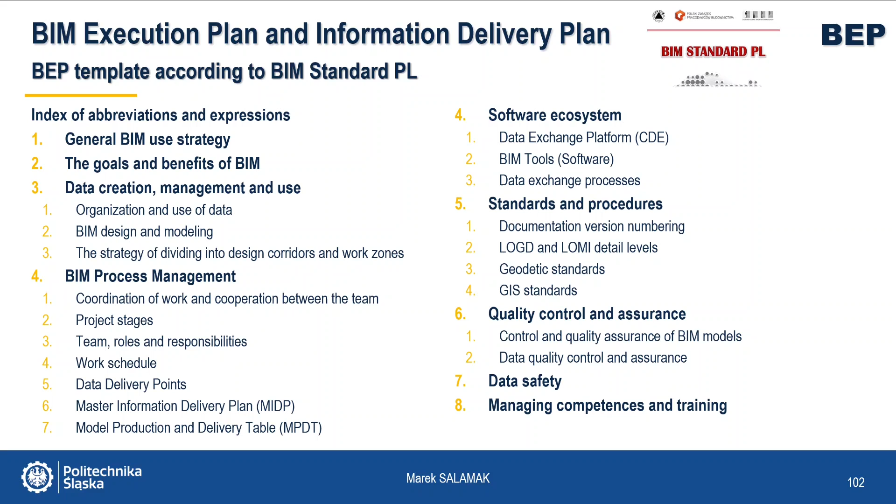Document templates with defined names and standardized structure are used for these. They mainly include the BIM execution plan, BEP for short, and the main and task-based project information delivery plan, in abbreviations MIDP, the Master Information Delivery Plan, and TIDP, Task Information Delivery Plan. This is what the next points of the BEP template according to BIM Standard PL look like. So we have 8 essential points preceded by an index of abbreviations and expressions.

We start with the general concept of how the contractor plans to use BIM in the implementation of the project. It should specify the planned scope of modeling, distinguished between individual industries and the use of BIM in traditional design and construction processes such as takeoffs and inventories, creating documentation, material lists, costing and scheduling, use of documentation on the construction site, and post-completion documentation as built.

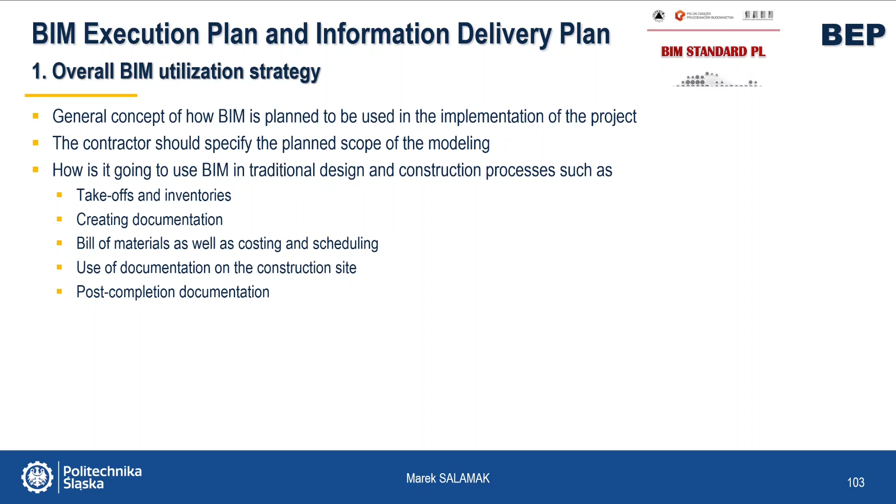At this point, the contractor should provide tables of BIM goals and benefits for the project. It is permissible to divide the goals into strategic, obligatory, and additional goals, in which the contractor will try to use BIM but doesn't guarantee the final results.

Further, the contractor should present a general concept of creating, managing, and using project information based on 3D BIM models and the design, construction, and operation information.

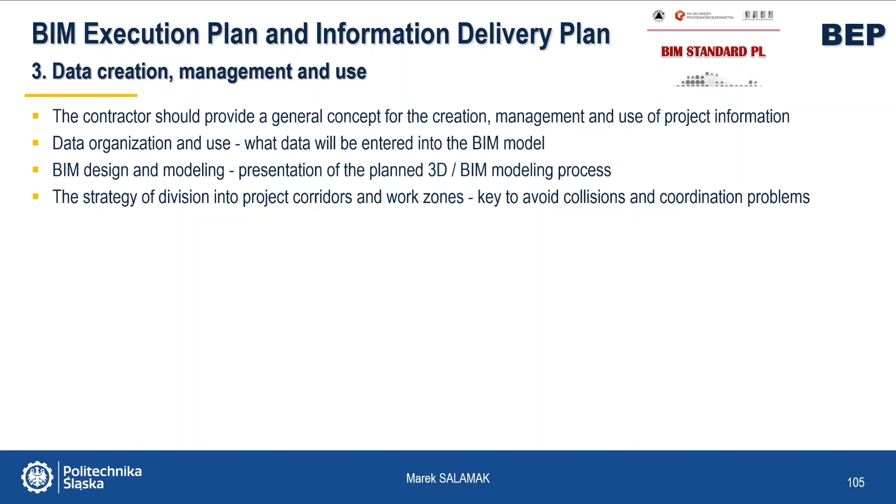Here it is necessary to list and briefly describe the individual stages of the project implementation, giving key dates of commencement and completion of works, and the person responsible for the correct and timely execution of the works.

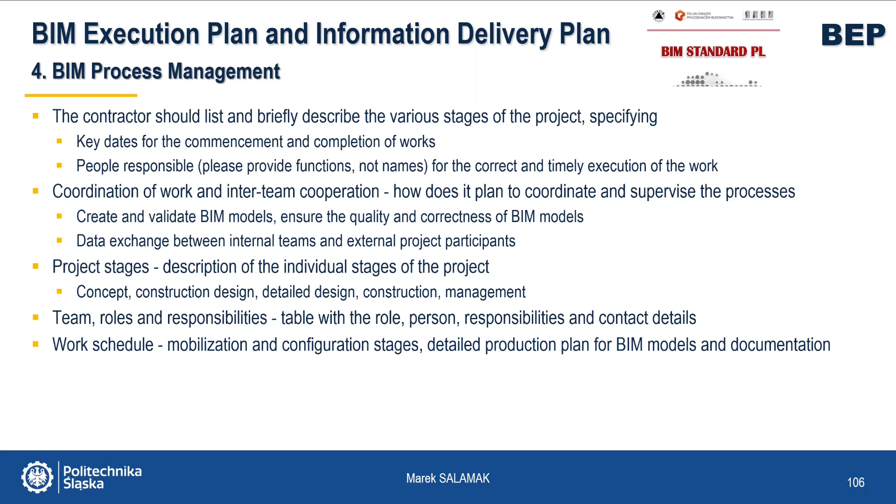The contractor should define the schedule of data delivery points. Therefore, it provides their quantity and type as well as the scope of data exchange at individual points. Data delivery points, or data drops, assume a gradual delivery of the produced documentation and allow for early detection of potential problems, both substantive, technical, or organizational.

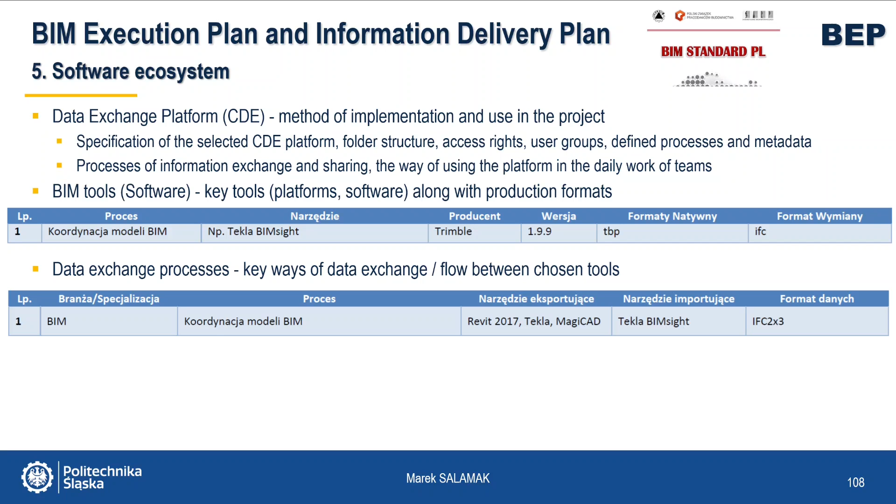The contractor should outline the software's architecture, including key system solutions and the main data flow routes. This is where the CDE platform and its use in the project should be presented.

The contractor should present the standards and procedures that will be implemented to ensure high quality and uniformity of BIM models and processes, CAD documentation, geodetic models, and GIS data. It also describes the adopted levels of detail of the model geometry and information entered into the model.

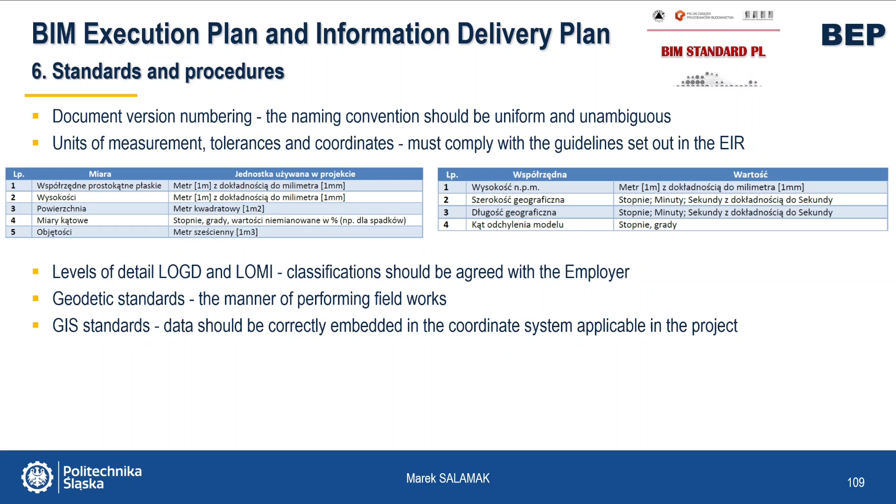Further, the contractor should describe internal verification and quality control processes. Both content-related and technical control of the produced documentation should be taken into account.

We are slowly coming to an end. At this point, the contractor should present how he will ensure security on the project.

And in the last point of the BEP document, the contractor should present how he plans to ensure the project staff's appropriate competence. Employees and subcontractors should complete the attached responsibility table, and the contractor should provide a training plan and active support for them.

And this is where we finish discussing the most important documents of the BIM process.

This ends today's lecture. We started with the interoperability of BIM tools, which is mainly implemented by an Open BIM approach. Then we discussed the data exchange formats and standards described in the three ISO standards. It was the IFC format, a description of processes in IDM, definitions in IFD. I also mentioned the BCF format and COBie non-graphical datasheets.